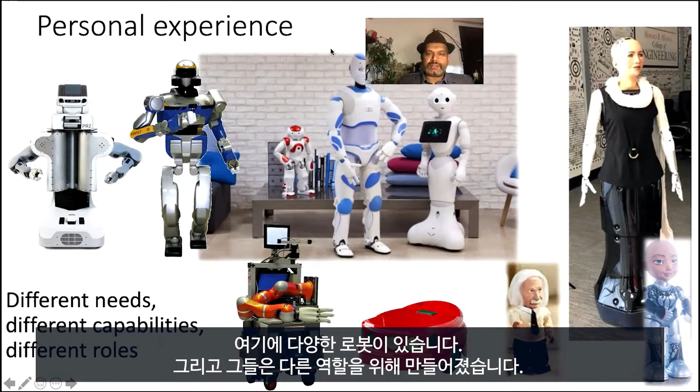So let us go to the point directly. There are different robots, and they are built for different roles. They have different capabilities. Their look, their shape, size, design, all can vary depending on why and for what purpose and how they are developed. Personally, I have had some good time, or at least some experience with all these different kinds of bots, physical as well as virtual.

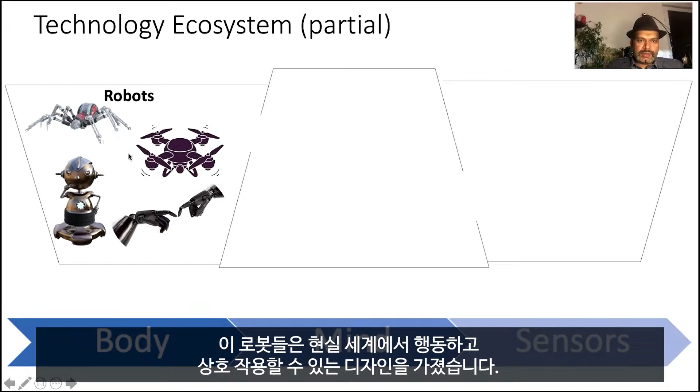We should keep in mind that there is always an ecosystem behind a complicated solution or system to work, and it's basically a combination of different technologies which are creating some impactful applications, even if we will talk about robots. So there are different kinds of robots depending on, again, the needs and the applications and the design, which are capable of acting and interacting in the real world.

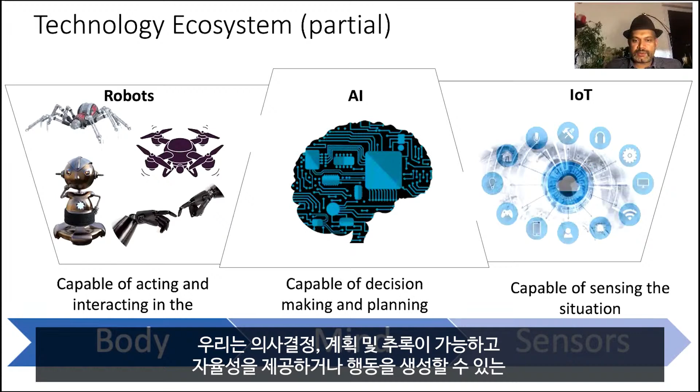And then there is IoT, Internet of Things, which are integrated and capable of sensing the environment, giving us at least some data or even some high-level information about the situation. And then we have AI, artificial intelligence, which is capable of decision making, planning, and reasoning, and even providing the autonomy or creating the behaviors.

So what we see here is that once we combine all these, we are actually getting a nice combination of body to act, senses to gather information, and mind to analyze the information and then signal the body to behave in the most appropriate manner.

So it is again a part of the bigger technological ecosystem, but it is interesting to see how different technologies are combining and creating interesting applications. And it is also changing.

There is a shift in the way robots have been deployed or perceived or used. In the past, robots were mostly isolated from humans. They were either in a remote natural environment or in an environment created mostly for robots, so we can say a robot-centered environment. The key here was that there was no human sharing the space with robots, or working very closely with them.

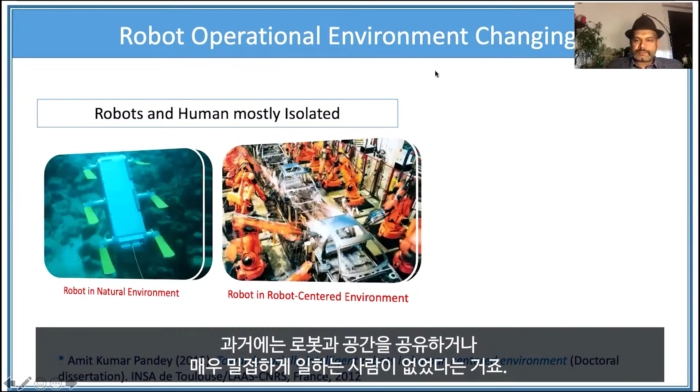And then this idea in the domain of social robots, human-robot interaction, emerged, and it created a new kind of R&D challenges, because now there are always some people around the robot. So how they should be behaving, acting, planning, or even interacting with others was very interesting to explore. At the same time, it created new opportunities to address many of the societal needs and challenges.

And these were the robots designed to work in a human-centered environment, the environment created for humans by us—objects, people, even the infrastructure. All this is for us, and these robots should be able to adapt, adjust, and act in this environment.

So with this new idea that robots and humans can really coexist in a shared environment, it also changed the way those robots were working in different tasks and scenarios. Now, even if they are underwater, they are trying to be collaborative with humans. If they are in an assembly line, there is human-robot collaboration, which we can think about and even experience these days.

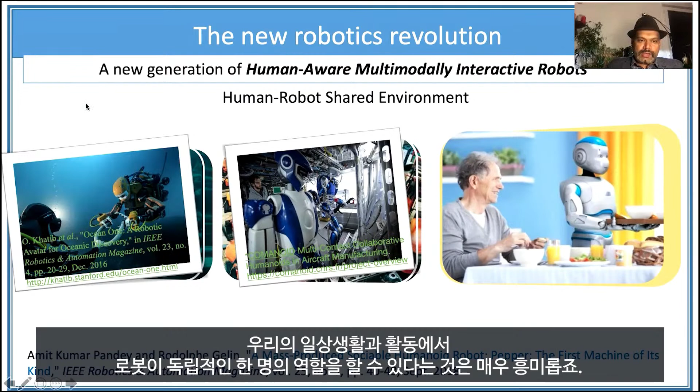And with this interesting idea that robots are now becoming part of our social life, they have to be social because they are now living in companionship with others, not in isolation. They are situated in a social environment, so they have to exhibit some kind of awareness about the people and the social situation.

They should also be able to understand or reason from others' perspective—for example, the notion of perspective taking, what a person is able to see or reach. These kinds of simple things are very much used in our day-to-day communication with other people, like knowing what the person in front of me might be able to see or not see. So this type of very interesting but fundamental reasoning capability is needed in these robots.

And then they should be able to interact, to engage with people, collaborate with people, and also consider some of our social, cultural norms and expectations, trying to see who can help them or how they can help people better. In this way, these robots will become more and more intelligent and interactive, and better fulfill our requirements and expectations.

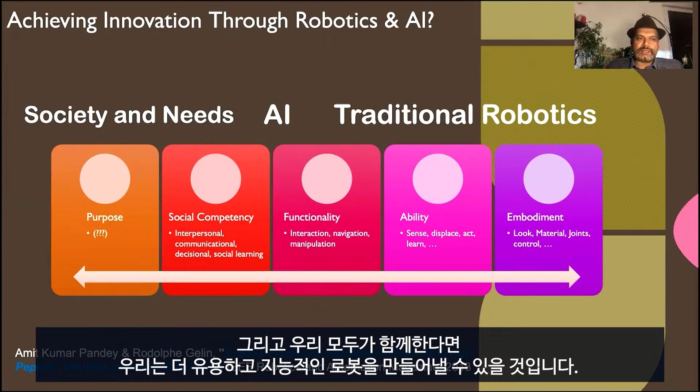And when we bring all this together, we will be able to better achieve useful and intelligent robots, which can really serve some purpose and be part of our day-to-day life in a long-term manner—not just for the novelty that, okay, there is something new, let me try or let me interact—but how they can be more useful in the long term.

So to understand those needs, there are various ways. Let us watch this movie clip.

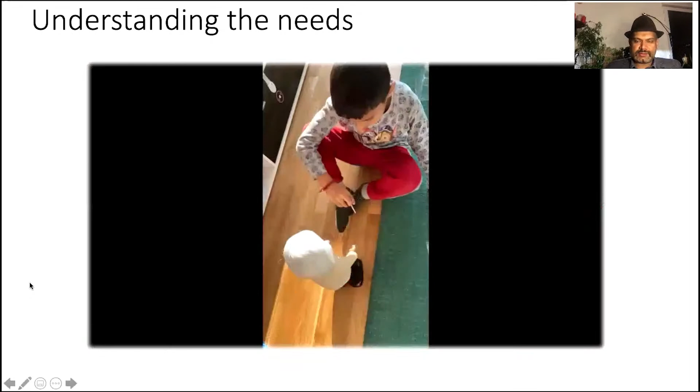Eat some lollipop. Will come and teach you. Do you want that to my friend? I don't know, only I am teaching. You want one more teacher? Yeah, but you give me lot of difficult questions. Maybe he might think that I'm a baby and just give me easy questions.

So there are many interesting things here, but one of the key messages is that once we let these kind of robots or interactive robots interact with people, with real people, we see interesting feedback, and we better understand what can be the potential need or requirement of such robots. Like in this example, the child is able to see a small problem in his life, and he is just trying to hope that this robot will better understand its situation.

So there is always some sort of expectation which is getting created when we let people and robots interact with each other, and that's very interesting. Sometimes perhaps we might not have thought about a particular application, but through user interaction we can get very interesting feedback.

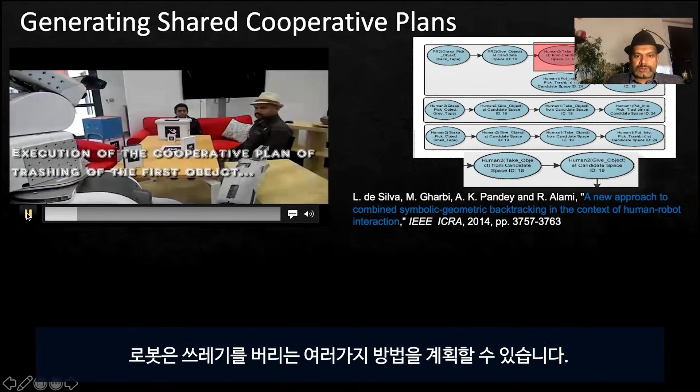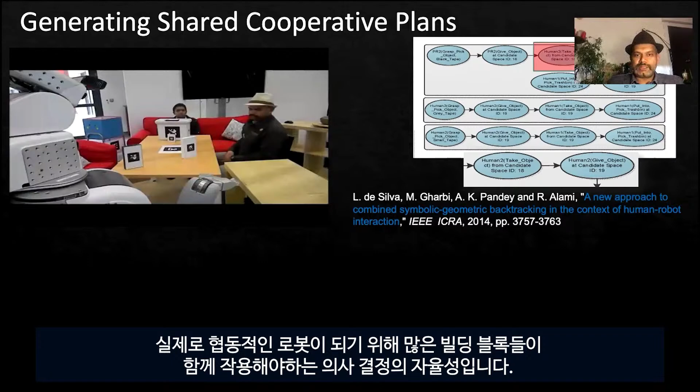Okay, so that can even go beyond to include different people, multiple agents at the same time. Like in this example, the robot is able to plan that this box should go in the trash bin, but it can be done in different ways. One of the ways is that it can give it to the person in the middle, and that person can give it to another person, who can put the box in the bin. So this is basically the autonomy in decision making, which needs lots of building blocks working together to be really a collaborative robot in whatever setup we can think about, including industry 4.0.

And then we also try to compare these capabilities with humans, and we got interesting feedback. I will not go into detail again, but you can refer to this paper if you are interested.

So then naturalness in the interaction is also very important, because we are capable of the same things differently, and we are able to understand different situations and behave accordingly. Again, I will not go into detail. Perhaps I can just play this video a little, if it will work.

Is there anything I should avoid in Qatar? Okay, and then we can ask: at what time are shops closed on Friday?

These are examples where we can have any kind of random question with bots, and they should be able to understand the context and respond. So there is always diversity in natural interaction, which should be addressed or handled by this kind of bots, depending on the social situation.

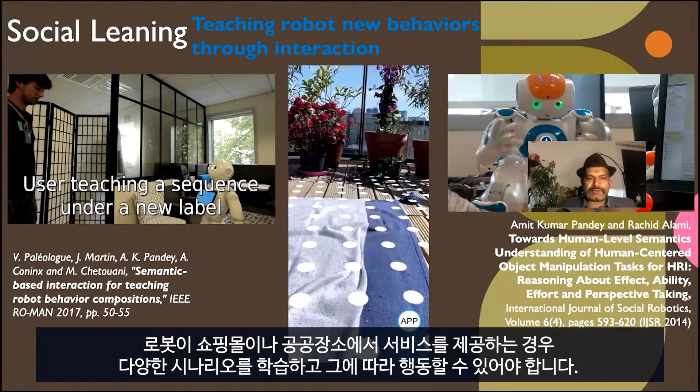So here a person is able to program the robot without writing any code. It is using the existing knowledge of the robot and trying to create a new kind of behavior that can be useful in different scenarios, because even for greeting in different places, there might be different ways of greeting people. If a robot is serving in a mall or public place, it should be able to learn and behave accordingly in different scenarios.

Similarly, let us watch this clip. Thank you. Did not get you. If someone says thank you, you should reply, you are welcome. Understood. Need to say you are welcome for thank you. Namaste. Did not get you. If I say namaste, you should say namaste. Understood. Need to say namaste for namaste. Namaste. Namaste. Thank you. You are welcome.

So here again, through interaction, we can teach interesting things to the bot, and it should be able to reflect that new learning the next time it faces the same situation or scenario. I will skip some part of the videos.

Until now we simply discussed some of the abilities. Now let us see some applications. Once we have those abilities in the bots, we can think about how they can be used. The key is that we have to bring society and its needs into the whole design process and understand the real scenarios or use cases. There are many use cases we can think about, like care settings, healthcare or elderly care, education, and the service sector. In terms of business, we can think about many channels like B2B, or directly going to consumer, or going to consumer through a business partner. And one which is very close to me is how we can go to society with interesting solutions and help solve some of the challenges.

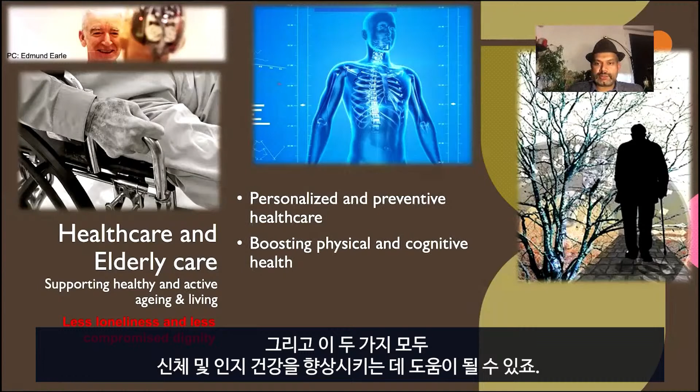Healthcare and elderly care is one area that can really support healthy and active living of people. Since people will feel more independent, not depending on someone else, they might feel less compromised in dignity, and obviously less loneliness will also be achieved. We can have personalized and preventive healthcare. These bots can even help boost physical and cognitive health, and they can break distance barriers, making telemonitoring or telemedicine more feasible. There are also settings where different cultural backgrounds are a factor, where having the right kind of intelligence in these bots can help them relate better with people from different cultural backgrounds. And why shouldn't we target that no one should really die just because they were not noticed in time.

With this kind of technologies and robots, we can really try to achieve this bigger vision. I will not go into detail of some of these works, but there is research pushing that they can help in boosting the cognitive health of people, even by simply recalling past memories or showing interesting facts and figures, or even talking on a daily basis.

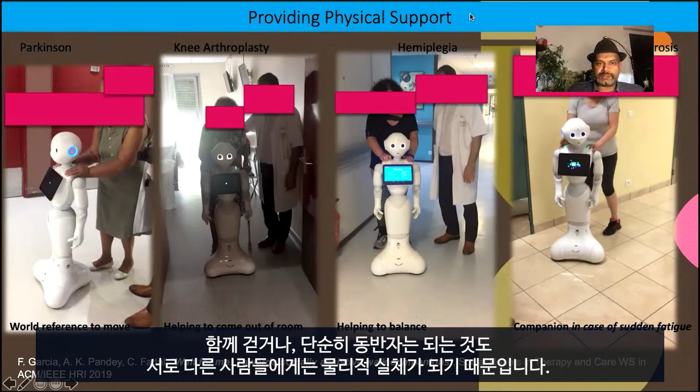They can even provide physical support because they are physical entities, helping different kinds of people, even in walking, or simply being a companion. They are also getting used for autism therapy, because these social robots are seen encouraging social skills, verbal and non-verbal, in children with autism, and even getting used to train a therapist.

Really, in education, robots are playing different roles, and at the moment, since they are able to repeat things thousands of times without getting angry or irritated, that is also in some cases an added value or a plus point.

In COVID and post-COVID times, they can really ensure that the social distancing we are all talking about does not lead to social isolation of all these people. There are studies, or at least some deployments, where prediction, monitoring, service delivery, and teleworking are getting facilitated through robots, which are also ensuring safety.

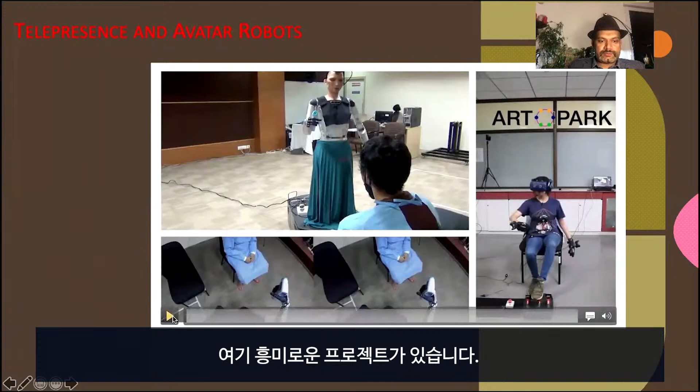There is this interesting project where a robot, Asha, is smiling while teleoperated by the operator, who is happy, on the right of the screen. The robot is able to go to a person and take their temperature, and even provide some physical support or bring a glass of water. All of this can be achieved.

Here the robot is working as the body, and Asha shows surprise, transporting the emotion as well as the action of the operator. This type of solution can be used in telemedicine scenarios, telehealthcare, tele-education, and even human-robot teammate scenarios through a tele-operated manner.

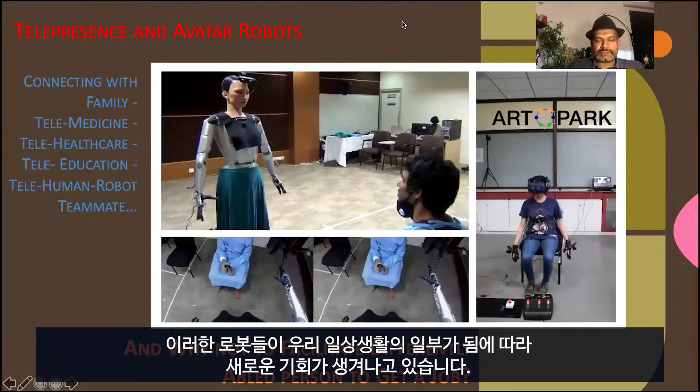These kinds of robots are also now facilitating a differently abled person in getting a job, because the person is using the robot as their body, and is then able to perform some of the physical tasks which they might not have been able to do otherwise. So there are really new opportunities emerging as these robots become part of our day-to-day life.

I will not go into detail, but I simply wanted to highlight that robots with the right kind of intelligence can help, and are already helping, in agriculture for precision farming or health monitoring of the soil, in tourism from customer assistance to facilitating remote interactive tours, and even in art and culture to exhibit a particular form of art or create awareness about a particular culture, language, or dance form.

And there are many other applications, like smart cities, flood and disaster management, security and crime prevention, smart cities and smart villages, space, defense, and many more that we can think of when robots, AI, and all these technologies come together.

But now we should think that we should not forget the social, legal, and ethical aspects as well. The key thing here is that these robots should be able to express, understand, and even create expectations. Even by their presence, they are creating expectations, being reactive, active, or even proactive, as I mentioned, by understanding the situation and then behaving according to it.

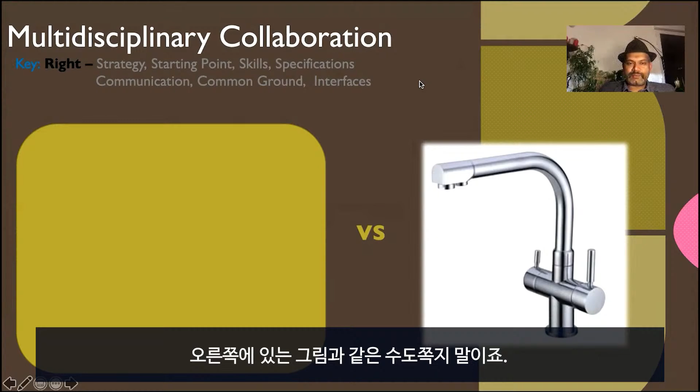But perhaps it is not a sustainable solution and not perhaps feasible as well. So that's why it is very important how we define all the collaboration and then what is the target level of technology readiness which we can achieve through the right kind of collaboration.

And in terms of market, it is increasing. So humanoid robot market, interactive robots market, service robot market - all these are having good annual growth rate. And they are finding different applications in different sectors, and sometimes they are coming together, combining and creating even new kinds of markets.

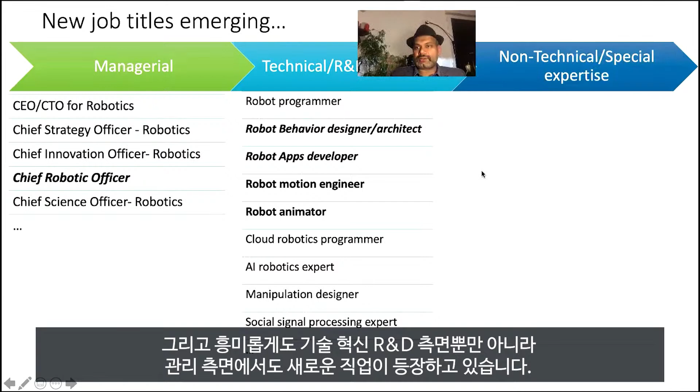And also new job titles are emerging in managerial as well as technical, innovation, R&D side, and interestingly on non-technical and special expertise side as well.

So we really need to bring a community and build a community and bring people together, and that's what we have been doing in the past, and we keep doing through different conferences, seminars, business events - when I say we as a community - and also through special issues in journals and publications.

And we have to keep exploring various collaboration possibilities to really make an impactful contribution to society. But the question is always: what is the right kind of robot, and what are the right kind of behaviors?

To find this, we have to always see the problems or issues which we are facing as a society. One of those is this report, which is very sad, that long working hours are really contributing to the death of people. That is not good.

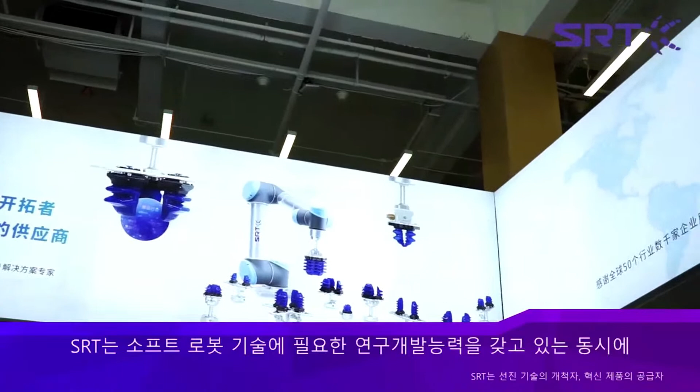Good morning, ladies and gentlemen. My name is Lin Tao of SRT. Before I joined SRT, I had been involved in the industry for a few years. SRT was established in 2016, and it's a technology company that has grown based on soft robotic technology. The headquarters is in Beijing, and it's one of two companies in the world that has soft robotics technology. SRT has the R&D capabilities for the development of soft robotics.

It is located in a high-end, high-tech cluster, and is cooperating with universities such as Tsinghua and the Chinese Academy of Science, along with other prominent universities in China. It has industry-academic research partnerships with many other distinguished organizations.

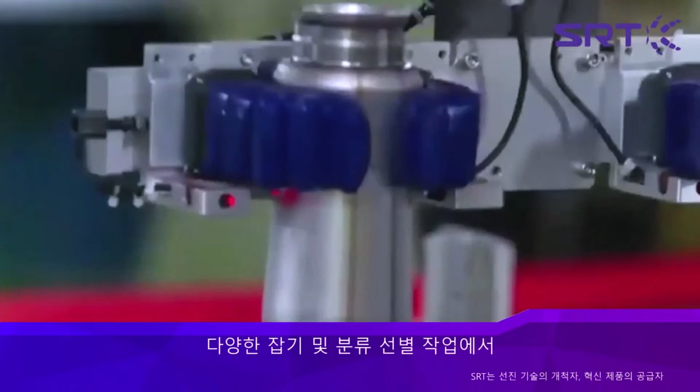The soft magic hands series launched by SRT is able to pick and grasp things very quickly, and it can do the operation without prior manipulation. Also, in production lines, regardless of the sizes of products or parts to be worked on, it is possible to use this robotics to select and grasp things. It can be used in many different industries, including automotive parts and 3Cs.

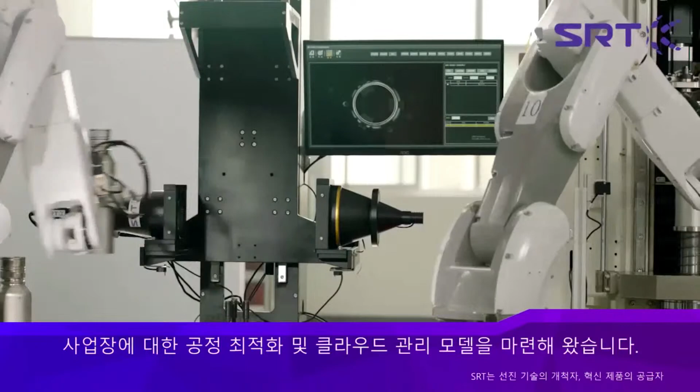We have exported to over 23 countries since the launch of the product three years ago. We have about 300 different customers, including global companies. We have established digital platforms as well as intelligent platforms, and provided personalized, smart working environments.

Now we're going to look at the robotic industry development status of China, as well as how SRT is going to grow in the future. China's robotic industry has been growing continuously, in terms of smart manufacturing as well as robotics. If you look at the global robotics market, this is according to IFR.

As of July 1st, according to data from this organization, for 8 consecutive years China has been the largest market and the one growing the quickest. It had about 25% of the market share, and in Q3 of 2019 it had about 44% market share. China's share of the world market has been growing very quickly and continuously.

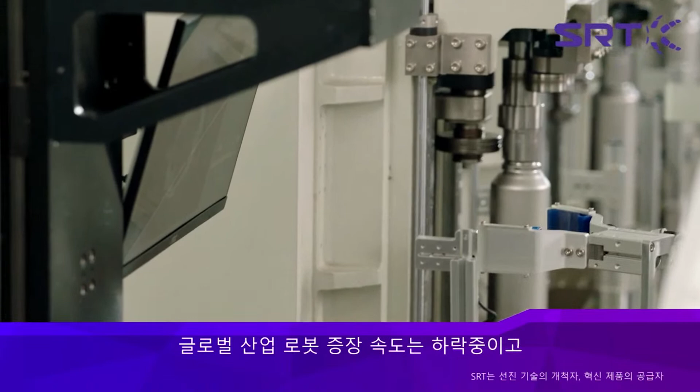Due to the pandemic, the global industrial robotic market has become stagnant and has actually posted negative growth—last year it was about minus 19%. However, the robotics market in China has continued to grow despite the global stagnation of the market.

With the global automation trend and the lack of labor, increased cost, and decreased population, robotics is going to play an even more important role.

According to IFR, the cooperative robot is going to be the next generation robot, and this shows the application for robotics: automotive, 3C, and electronics. In 2018, within the robotic market, automotive accounted for 32%, electronics 21.5%, and combined they account for 53.5% of the total market. So the integration is quite high, and industrial robotics takes up an important part in the automotive market.

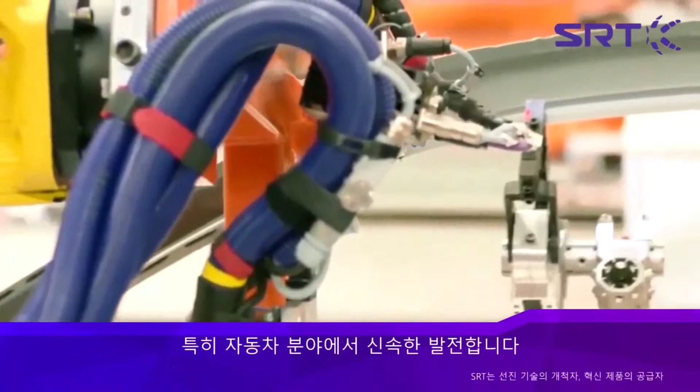As you know, the automotive industry itself is growing very quickly, and robotics can be used in many different stages of production, realizing more facilitated and efficient production procedures. Robotics can work in very difficult environments and do repetitive work without errors.

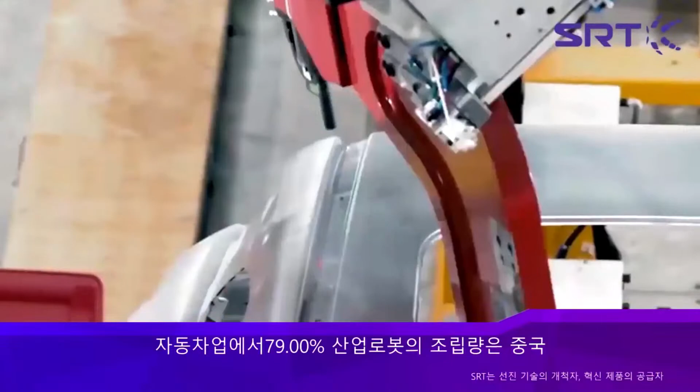In the automotive area, according to IFR, the global industrial robot has accounted for 30% in terms of application in the automotive market. And within the automotive market, industrial robots, according to OICA, account for about 79%. Japan, Korea, the US, Germany, and China account for the largest shares of the international market, with China taking about 31%.

In the automotive OEM inventory, that has grown by about 3% year on year, and the industry itself has grown by 5%.

We expect there to be increased production of automotives in large cities in China, and after the pandemic, there's going to be even more demand for automotive production. According to the ministry, in 2020 there were about 25 million cars sold in China, and that number is expected to increase going forward.

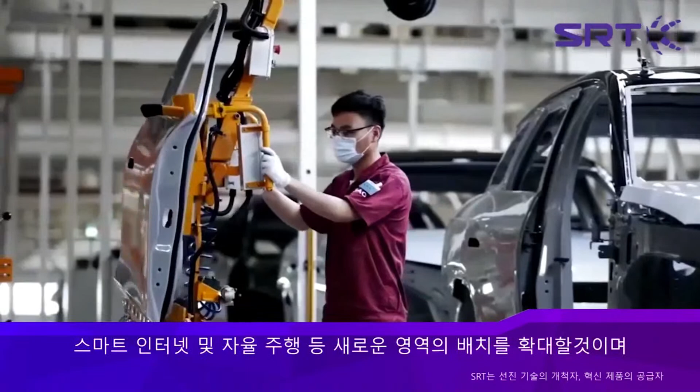Vehicles using renewable energy, thanks to new technology, new materials, and new systems, will be taking up the mainstream of the automotive industry going forward.

The 3C industry—3C refers to computers, communications, and consumer electronics—includes computers, handsets, digital audio players, smart wearables, and smart home living products. This is where robotics are used and applied widely.

In 2018, for 3C, robotics deployment accounted for about 30%, and China accounted for about 43% of the market share. In traditional 3C products, that is computers and smartphones, there has been stable growth, and in new 3C products such as wearables and smart living homes, we expect significant growth going forward.

For wearables, that means smartwatches, wireless headphones, and VR/AR helmets. And for smart living, we're referring to technology used at home to control things related to living, including things such as smart routers.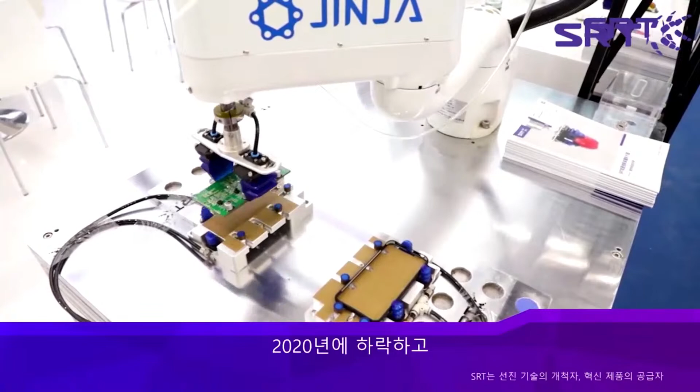In traditional 3C products, according to Canalys, global computer (personal computer) shipments decreased in 2020. However, they recovered in 2021, and are going to increase by 2% in 2022, reaching about 3.75 million units. The annual shipment of personal computers is going to grow by about 4% year on year in 2021.

For 5G handsets, there is going to be an increase in smartphone shipments. According to the robotic industry, it's not just limited to one industry—it's relevant for many different industries, as I've just explained. The industrial robotic market is going to continue to grow.

When we talk about the technology, we have to see what robotics and robots can do. A robot must have the capability to do work, to move, and to converse if necessary.

For service robots, they should be able to conduct dialogues and learn, and for these capabilities, we do need to develop advanced technologies even further, including detection technology as well as visual and laser technology development.

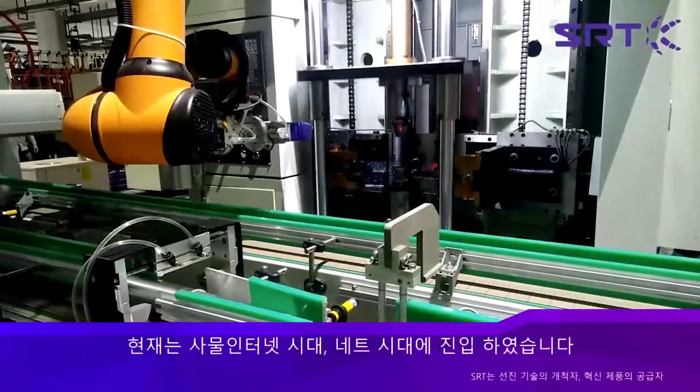Robots have to be able to act and put into action, which means they have to be able to learn and converse, and to talk in physical languages, that is, body languages. With the IoT and networking era we're living in, robots should be able to protect themselves, but also protect the network they're within. So this safety and security related technology is very important.

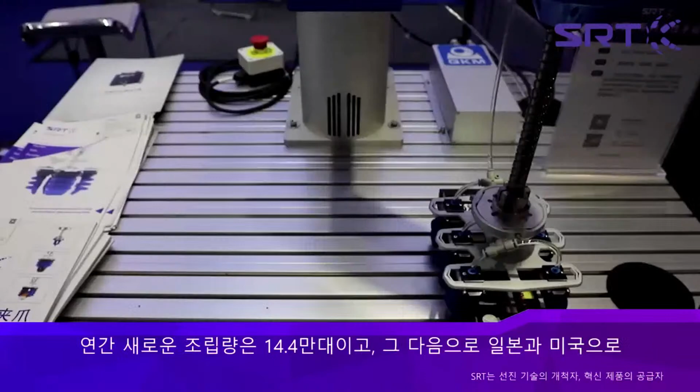In 2019, countries such as China, Japan, US, and Korea accounted for about 73% of the total industrial robots market. The annual newly assembled units reached about 144,000. If you look at the density of the robot, it's about 113 units per 10,000 people. The most integrated markets are Korea and Singapore, with about 918 and about 500 per 10,000 population respectively. The largest market with the highest demand is China.

However, China is behind other advanced economies, which means China has more room to grow. Robotics are developed in three stages.

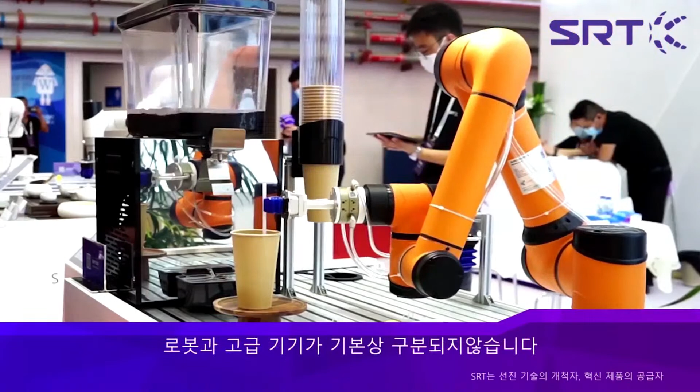The first one is the automation stage, where robots and advanced devices are not distinguishable. According to a writer in Czech, a robot should be more than just advanced equipment or a facility. It should be able to control. It should be able to do more.

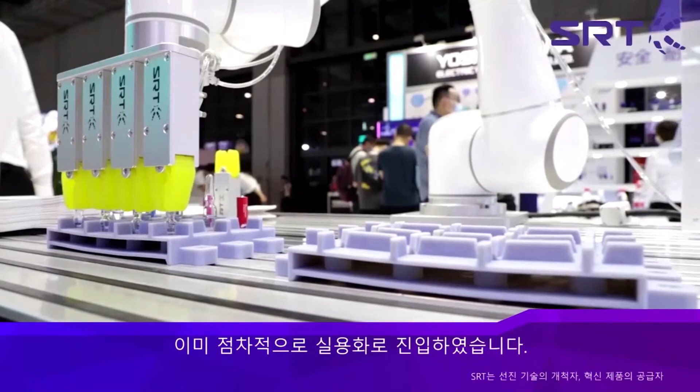Then there's the second stage of development, which is the smart stage. Here, the robot should be able to cooperate with people and detect what's in the environment. For the second stage, we need technology development. Currently we are in stage 2, and stage 3 is where we need to move towards, which involves more autonomy, recognition, learning, and interaction.

For small robots, they have already entered stage 3, and many different products will be introduced for stage 3 robotics development.

China needs to make up ground in terms of technology, and according to the soft robotic technology company, they will continue to do technology innovation and global deployment, and improve production as well as management, so that they will be able to lead the industry. They will also be recruiting talent from distinguished universities and other organizations, and try to become global first as much as possible.

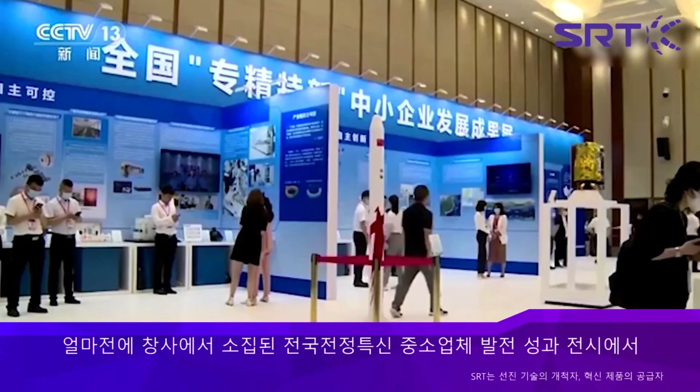This year in China, there have been innovations in many technologies which have helped China become a leader in many areas. The Chinese economy is trying to make an advancement.

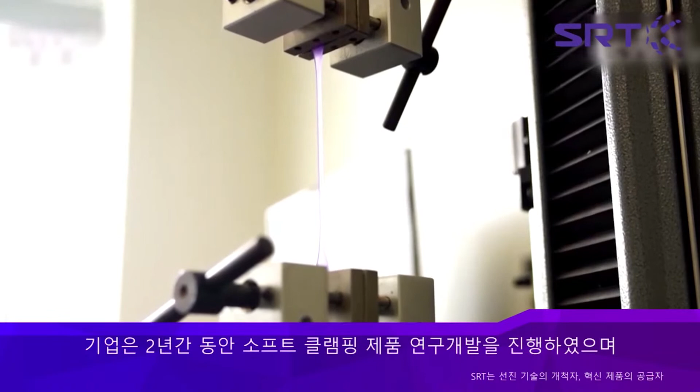At a recent exhibition, a robot was displayed where it can pick up small things as well as soft things. This is robotic technology based on soft clamping. This type of product has been sold to over 23 countries. We have been growing about 3 times, and we have been able to increase our sales by about 8 times. So how was this particular company able to do this? They were able to position itself uniquely, obtaining a unique position in the market using this soft clamping technology.

And in 2018, it was able to succeed in the research and development of this technology, and it was able to solve the problem of picking up the very, very soft raw materials or component parts in the manufacturing production processes.

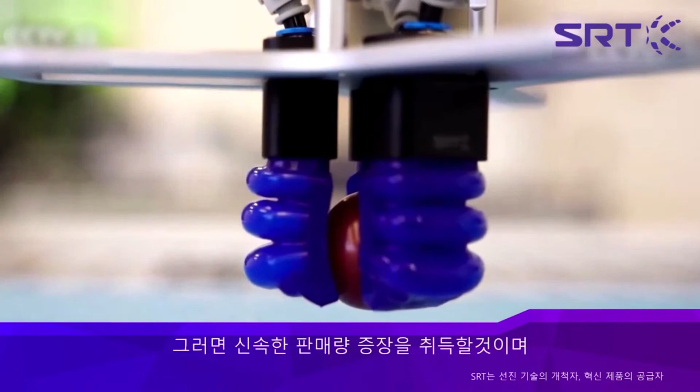We believe we'll be able to post good growth, and we will be able to further develop our products and advanced technologies. With more sophisticated marketing, we'll be able to post growth that is about 3 or 4 times faster. In case of this company, for the past 5 years, it has invested over $90 million in R&D.

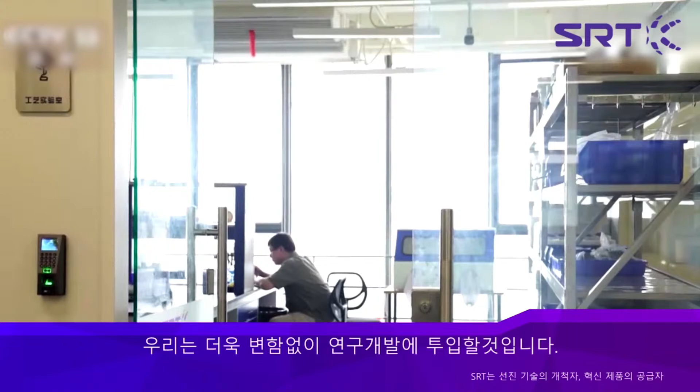Of 200 employees, only 5 are in sales. Most of them are in R&D. It has over 100 patents, and international patents about 4, and it was able to get recognition from the government ministry. We will continue to make investments in R&D, and we will create additional value through continued research and development activities.

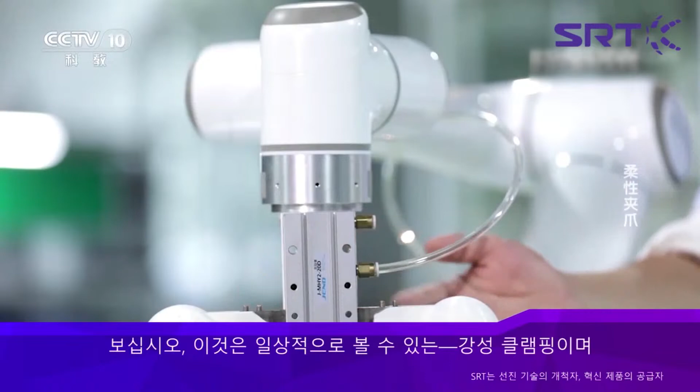New products, new inventions have been displayed. They are quite curious. We have these 2 clamping devices here, and this is the clamping device that's used widely currently in the market.

As you see, it cannot grasp the egg without breaking it. But if we use a soft clamping, it is able to grasp the egg without breaking. Let me show you. It's even able to grasp the yolk.

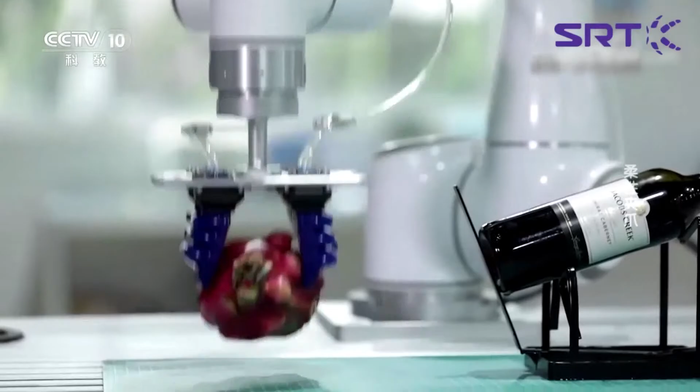It successfully did this. Egg yolk, as you know, is irregular in its form, but the machine was still able to pick it up or grasp it. Soft clamping is made of soft materials, and the material is quite flexible as well as soft.

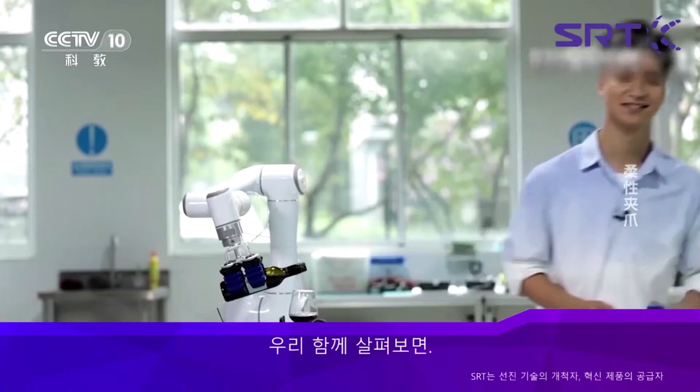And it's soft, but it's able to pick up a lot of things. How does it do it? We've done the necessary control tests, life cycle tests, and many other tests.

This technology is different because mobilizing fingers are used, and it actually moves as if a human hand would move, and they would be able to flex and reflex, and be able to grasp and release the object that it is trying to grasp and hold on to.

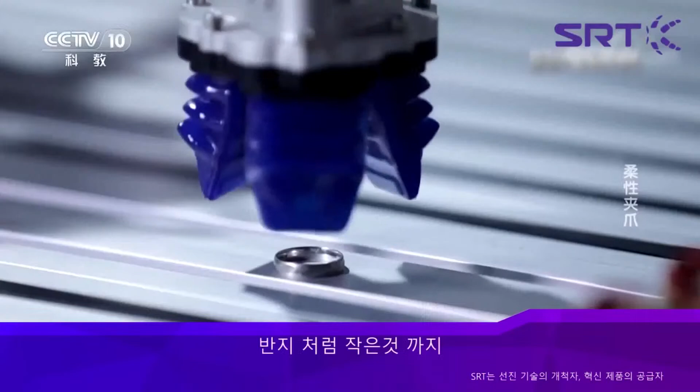It can also hold large things, as you see here, and it can also grasp and pick up a very complicated component as the one you see here. In the manufacturing processing line, it is able to help with very high precision assembly, and it can be operated 3 million to 6 million times per time unit.

It uses soft, intelligent materials, and it can be integrated into a bigger system, and it can be used to lift heavy things.

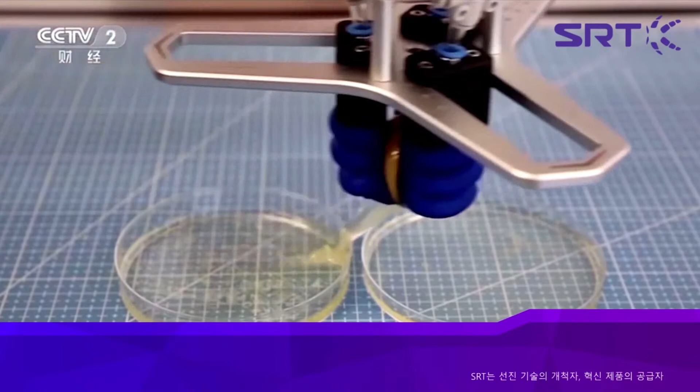You see, the soft clamping device is picking up the egg yolk. There is a membrane on the egg yolk which would break if you pick it up with your hand, and the yolk would break. But if you use soft clamping and its air pressure, which serves as fingers, it is able to pick up the egg yolk without breaking through the membrane covering it.

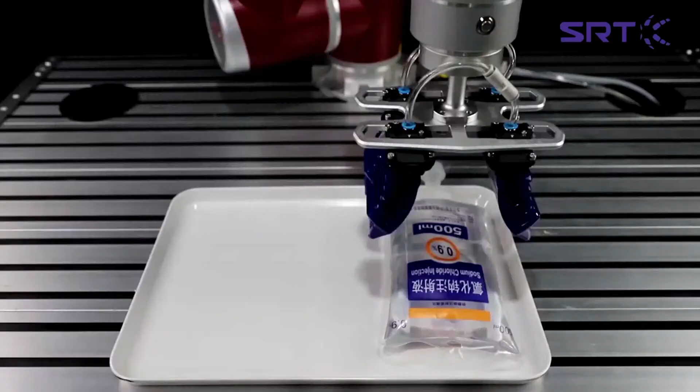That has been Mr. Lin Tao of SRT. He has told us about the growth of the industrial robotic market of China.

Now we're going to introduce you to the third speaker. Director Chusuda from Zhejiang HuaRay will give us a presentation on the status of logistics robots and the prospects.

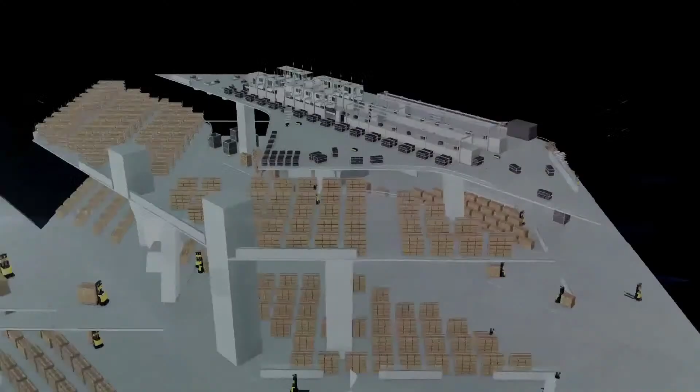Distinguished guests from home and abroad, I am Chusuda, an overseas sales director of Zhejiang HuaRay Technology. HuaRay Technology Company was established in February

2016, and is a specialized company that conducts R&D, production, and sales of machine vision and mobile robots.

I joined the company in its early stage and served as an overseas technical support engineer, overseas sales manager, and director. I am very happy to be invited to 2021 Robotworld as a speaker.

My presentation is divided into two parts. The first part is about the current status and outlook of the robot industry, and the second part is about the introduction of the company, its products, and successful performance.

Many high techs are interconnected with robots, and this can be seen in machine learning, IoT, human-to-machine systems, and autonomous mobile systems.

Intelligent robots are major components of manufacturing data, and global manufacturing is currently facing great challenges. However, due to rapid changes in consumption demand, resource shortages, technician shortages, aging population, and demand for local products, the automation of flexible robots is providing solutions to these challenges.

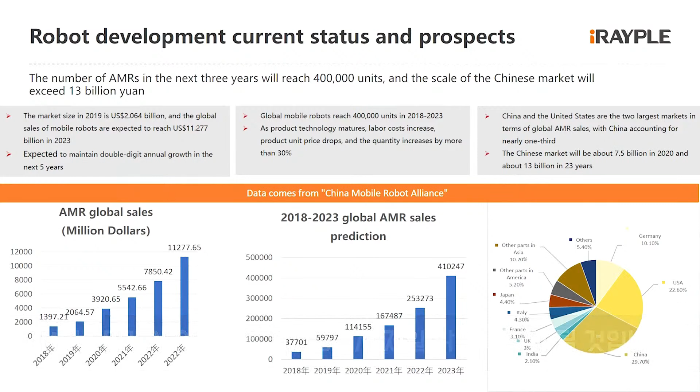Autonomous planning ability refers to the robot's ability to avoid obstacles, and AMR has self-determination capability, making it more suitable for working in complex dynamic environments. The future of this market is huge, so we have great expectations for AMR application and technological development. Although AMR has this advantage, we don't simply think of AMR as an intermediate step or substitute for AGV.

The development trend of global robots cannot be stopped; it will continue to show a developing trend. As product technology gradually matures and potential labor costs increase, product costs will continue to decline, but quantity will increase by 30%. The size of the Chinese market is expected to reach 7.5 billion in 2020 and 13 billion by 2023. Both the development of mobile robot technology and the types of products will be diversified, and relying on technology platforms to quickly introduce new products will be the future direction.

Modern manufacturing is characterized by mobile robots completing transportation tasks in a highly efficient, intelligent, and smart manner. In particular, some new manufacturing areas require close collaboration between robots and humans.

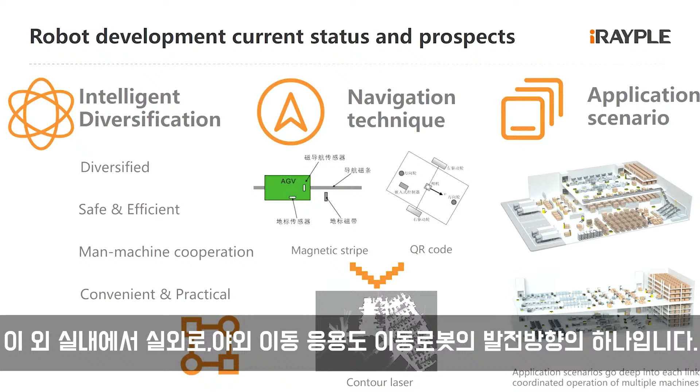In the future, there will be fewer AGV-centered projects. How different types of fixed robot movement work in harmony with mobile robots and other facilities is key to realizing corporate plans. The shift from indoor to outdoor, including semi-closed spaces, is one of the development directions of mobile robots.

In detail, the sales strategy of mobile robots centers on warehouse-type AGV and forklift-type AGV, and these two AGVs will still be important in coming years. In terms of industry, the public favors the AGV strategy the most, and main industries will be logistics, automobiles, 3C, tobacco, and indoor packing.

Forklift sales in the domestic market will continue to increase. Market demand will shift from traditional forklifts to AGV forklifts and will gradually increase. AGV forklift sales will continue to increase and marketability will also be high.

Second, let me introduce our company, products, and results. HuaRay Technology was established in February 2016 and specializes in R&D, production, and sales of machine vision and mobile robots. The company has accumulated technologies by focusing on extensive R&D, with strength in machine vision and mobile robots, and we have constantly conducted quality innovation and introduced products.

We have more than 10 years of screen processing experience and are currently supplementing our weaknesses. We also have 20 years of software development capability, more than 600 employees with R&D manpower around 400, and we have an IPD R&D system and Six Sigma quality management system.

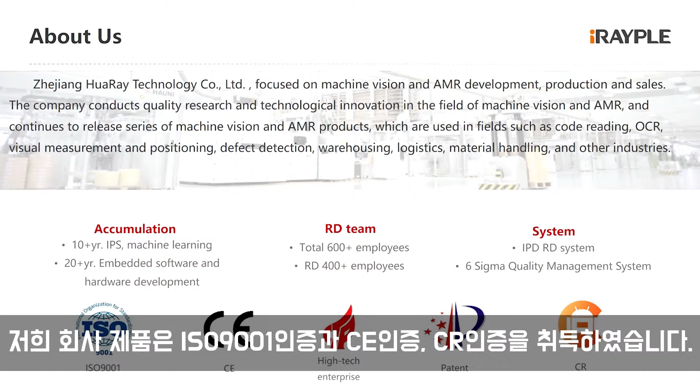Our R&D skills include hardware technology and smart calculation, ISP technology and optical technology, and FPGA technologies. We have completed one national project with 355 patents and 32 software registrations. We have high-tech knowledge and ISO quality certification.

We are a member of CMVU, the China Machine Vision Industry Alliance, and the Europe Machine Vision Association, and our product won the Red Dot Grand Prize and the Chinese Design Award.

Our products include lifting AGV and forklift AGV, with calculation methods including immediate control, motor control, navigation, occupational control, and smart management. Our software includes RCS control system, ICS comprehensive control system, and mobile app. Our products are applied to new energy, 3C manufacturing, automobile manufacturing, semiconductors, logistics, machinery, medicine, and food industries.

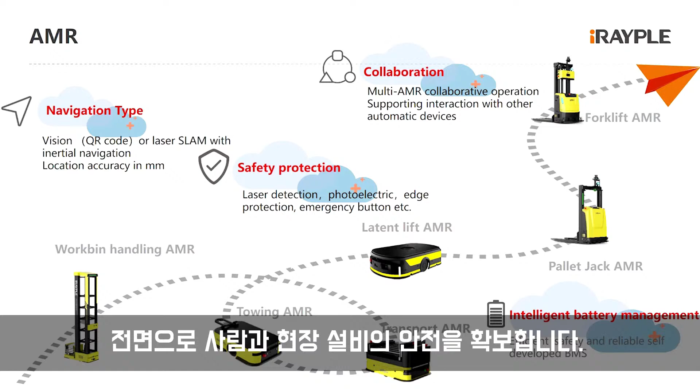As you can see here, in all systems, AGV is carrying out various specific tasks, and our control system, ICS, is in charge of allocating and executing AGV's tasks. At the same time, the control system accepts user-level tasks. For example, in the case of WMS and MES systems, after completing a task, it will return to the upper system depending on the situation, forming a closed loop in the overall operation process.

There are mainly three systems: AGV control system and mobile app. This is an RCS control system that we researched and developed 100% on our own, and it is the soul of AGV logistics transportation.

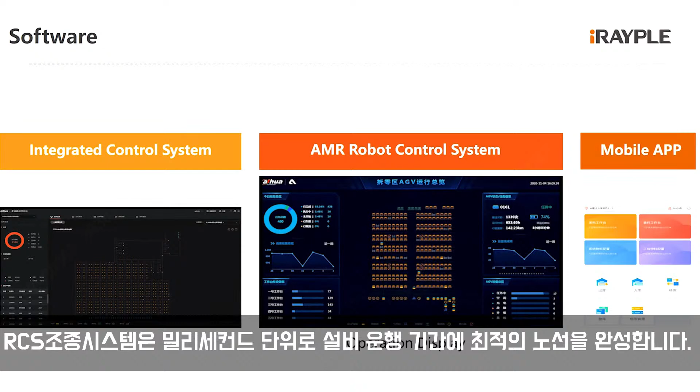The maximum control capacity can control the operation of 300 facilities at the same time, while the RCS control system completes the optimal route during the facility operation period in milliseconds. If the pre-designed route is complicated or fails, the system immediately plans other routes of the facility so as not to interfere with the performance of the mission.

And the platform allows you to observe the operation status, mission status, charging status, alarm, and so on online in real time.

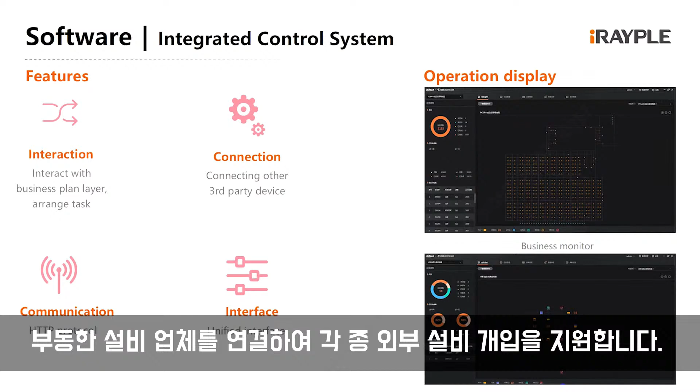The current AGV operating system is not an independent, lonely island. For example, AGV facility should be connected to production line machines, and with the automatic door design, they arrive from different areas and on different floors by elevator. And compatibility between the third-party system ICS and other facility is automated.

First of all, it is an elevating AGV that has strong performance and is widely applied, and the facility has a lightweight design with a small area and low power consumption. The number of applicable places will increase, and there are two methods, QR code navigation and laser navigation, and the accuracy of location tracking is relatively high, making it safer and more reliable for places where various necessary solutions are converged. Currently, the facility has two mounting capabilities of 600 kilos and 1 ton. Both logistics and warehouse operators of various production lines can be selected.

And it's a forklift type AGV. The facility is modularized using a laser navigation method, and its basic mounting capabilities are 1.5 tons, 2 tons, and 3 tons respectively.

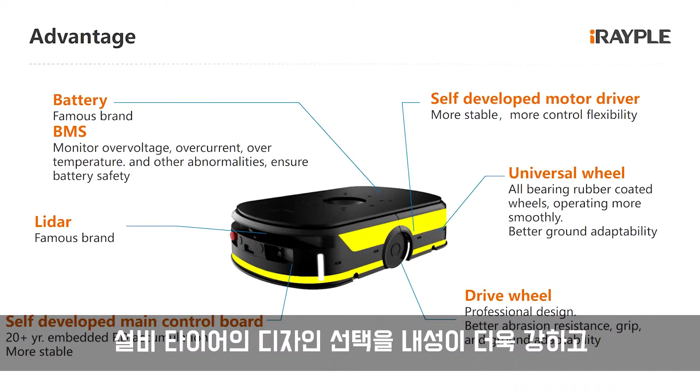And we also do our best when selecting materials for applications. In the power core electronics section, we select a famous design brand in the country and use in-house BMS to effectively use batteries and monitor abnormal situations such as overvoltage, overcurrent, and high temperature in all processes. And for laser, we use industry-leading brands of Germany or Japan in addition to third-party products. Through accumulated experiences over years, we use in-house product as well for the main control board and driving parts.

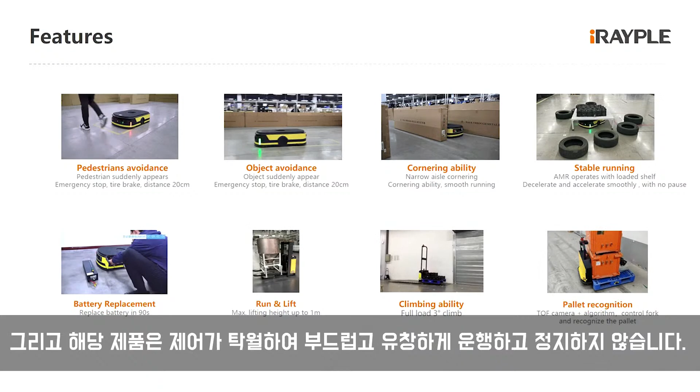Next is our product introduction. The elevating AGV capability is so brilliant that the AGV immediately judges all passersby and goods that appear out of nowhere and activates the brake. And the product has excellent control flexibility, so it runs smoothly and does not stop.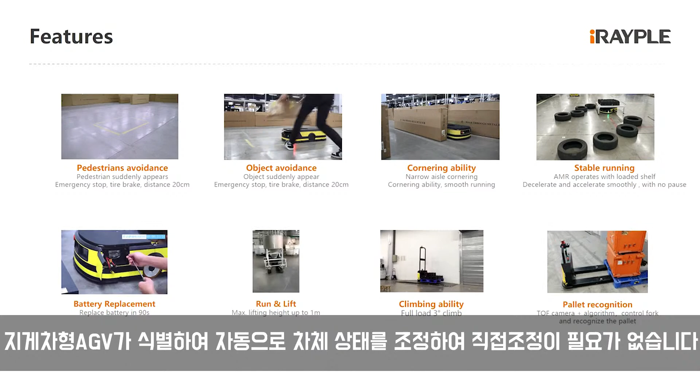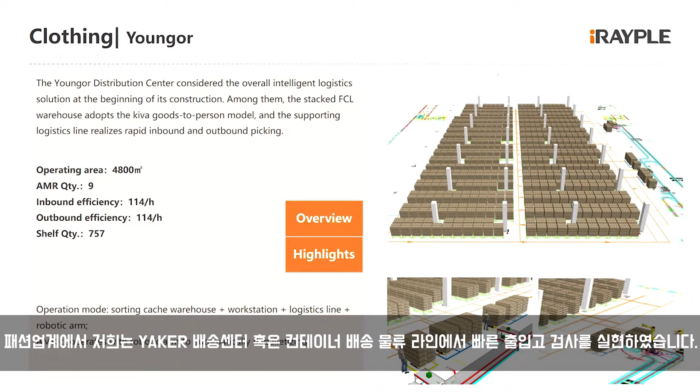And in the same smart production line logistics area, we put various AGVs into the Xiaomi Technology Smart Factory to complete the connection with the online facilities of the upper system to provide more accurate logistics management.

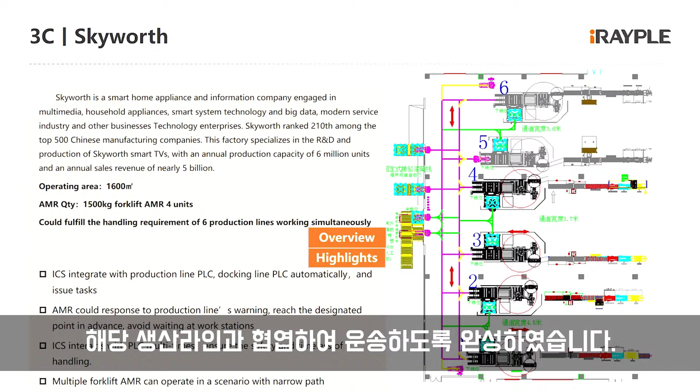And at the same time, our AGV is also applied to the financial industry. The lifting type AGV has completed the inventory check of the money pocket case to realize unmanned management of cash safe. And at the Skyworth plant, we connected the on-site production line with a forklift type AGV to satisfy the transportation demand for the production line to operate at the same time. By automatically supplying and withdrawing raw materials, customers can flexibly produce them.

And lastly, iRAYPLE Technologies' slogan is to a smarter factory. And iRAYPLE company will join the waves of production line logistics and smartization. And I am looking forward to the successful forum. Thank you very much for your attention.